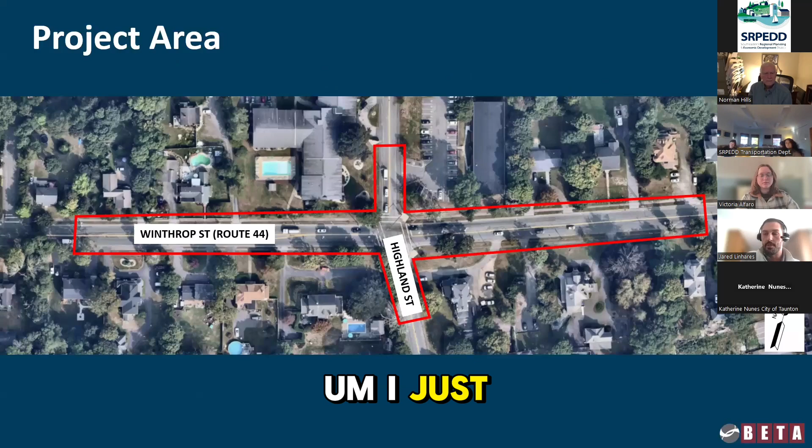My name is Jared Linhares. I'm the project manager from Beta Group, representing the city of Taunton as their design engineer for the project. I just want to start off with a brief project overview.

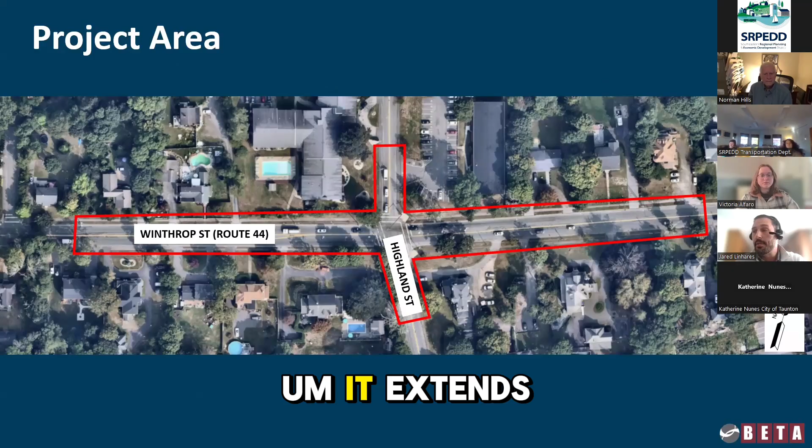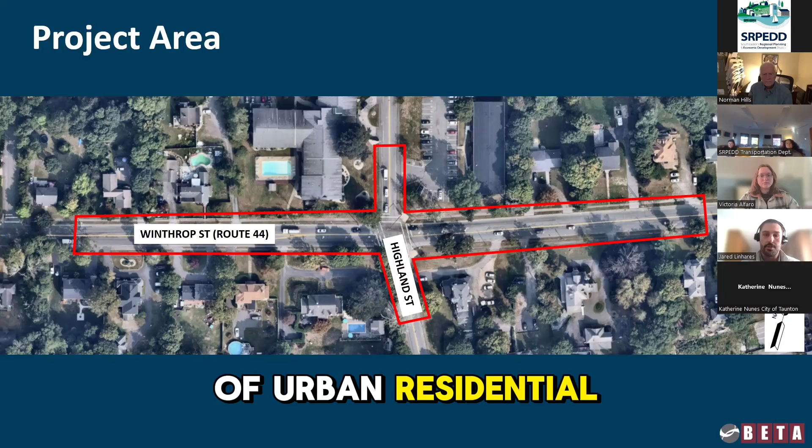The land use in the area is a mix of urban, residential, both single families, multifamilies, and apartment complexes. Highland Street runs in a north-south alignment, and both of these roadways are city jurisdiction.

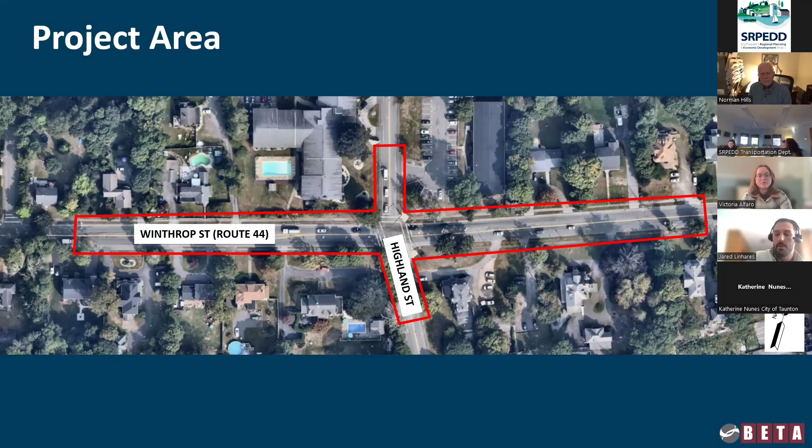The overall project limits on Winthrop Street are approximately 1,100 feet, and the overall project limits on Highland Street are approximately 320 feet.

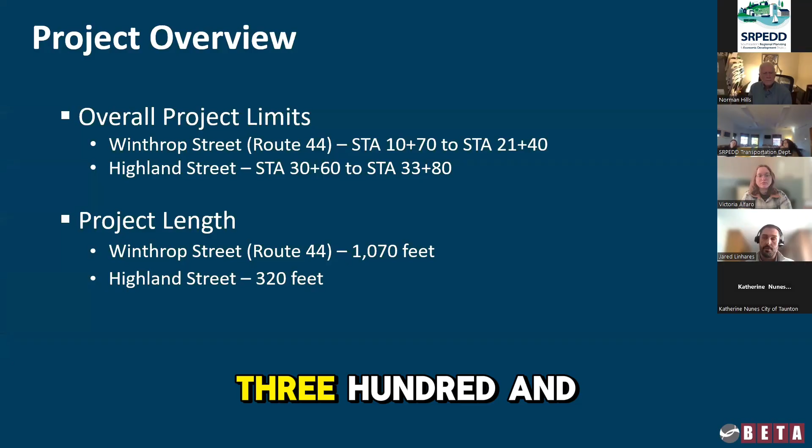This intersection was identified as an HSIP cluster for both the 2016 to 2018, as well as the 2017 to 2019 crash clusters. So as a result, we did a roadway safety audit in May of 2024, which was finalized in August of 2024. I just wanted to note that since then, this intersection is no longer noted as an HSIP cluster as part of MassDOT's latest years.

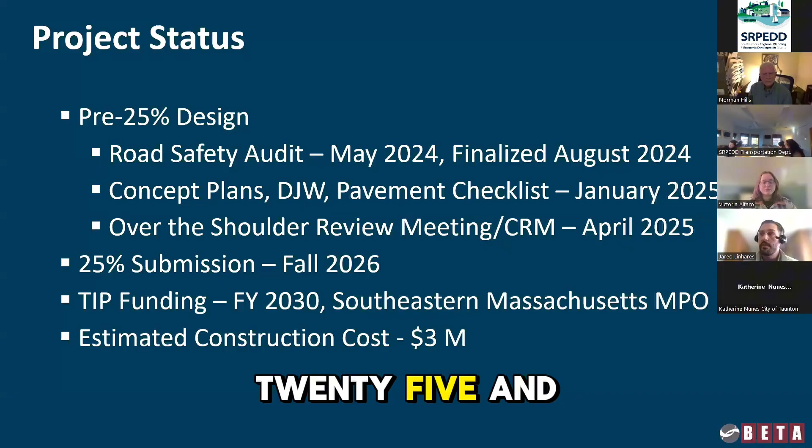The over-the-shoulder deliverables were submitted in January of 2025, and the over-the-shoulder comment resolution meeting was completed in April of 2025. The submission is expected in the fall of 2026 for the full 25% submission.

The TIP funding for this project is slated for fiscal year 2030, with an estimated construction cost of approximately $3 million.

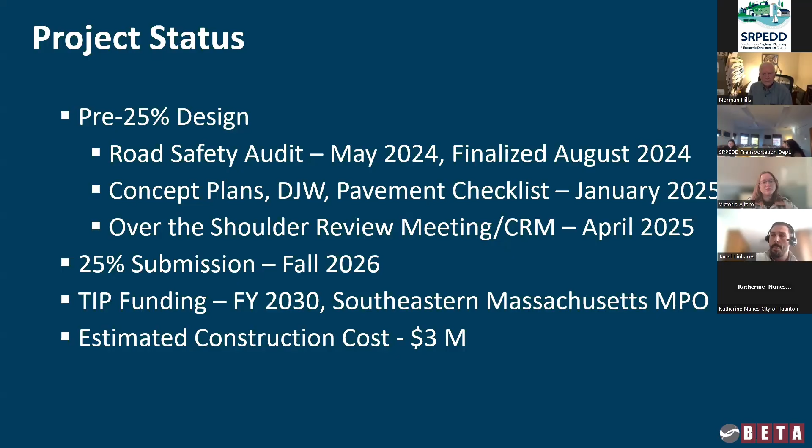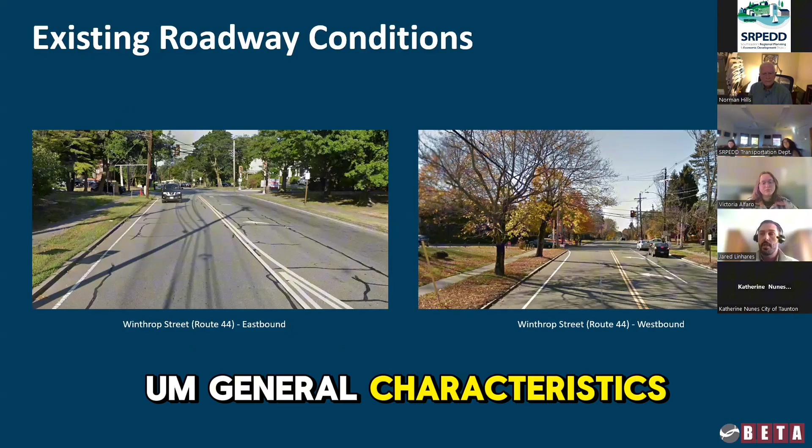Some of the existing roadway conditions - we'll start with Winthrop Street. We've got photos of both eastbound and westbound shown here. General characteristics: there's 11-foot travel lanes in each direction.

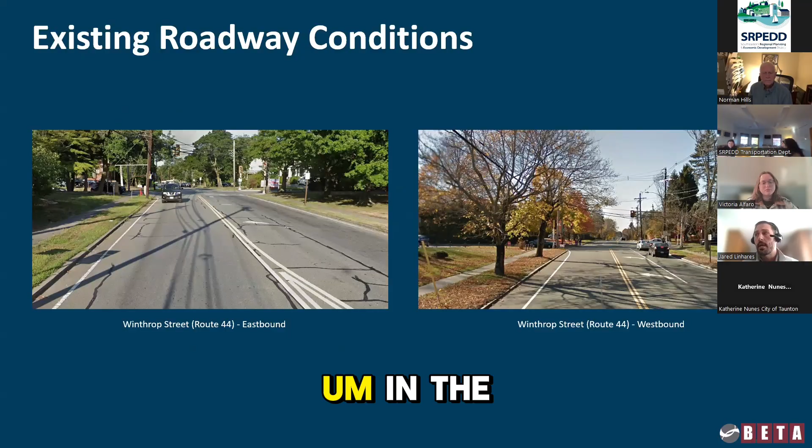As you approach the intersection, there is a dedicated left turn lane in both directions. In the eastbound direction, the length of the turn lane is approximately 180 feet currently, and the westbound is approximately 120 feet.

There's a double center yellow line with approximately 2-foot shoulders, and then there's bituminous sidewalk on both sides with a grass strip of varying width between 2 and 4 feet.

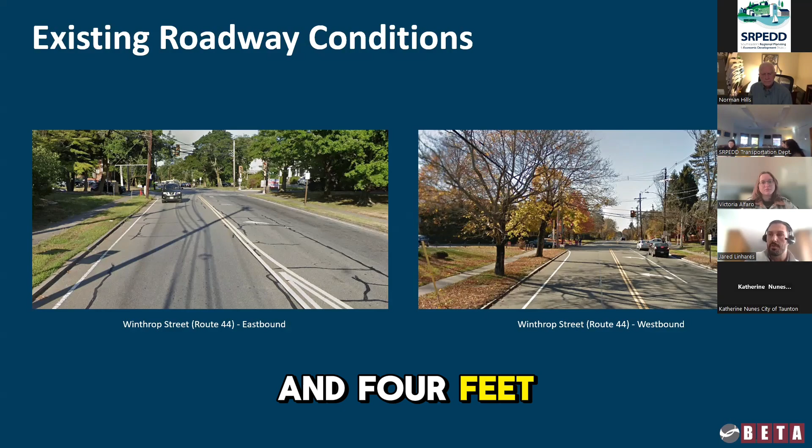On Highland Street, we have 13-foot travel lanes with no striped shoulders and a double yellow center line. There's also bituminous sidewalks on both sides of Highland Street.

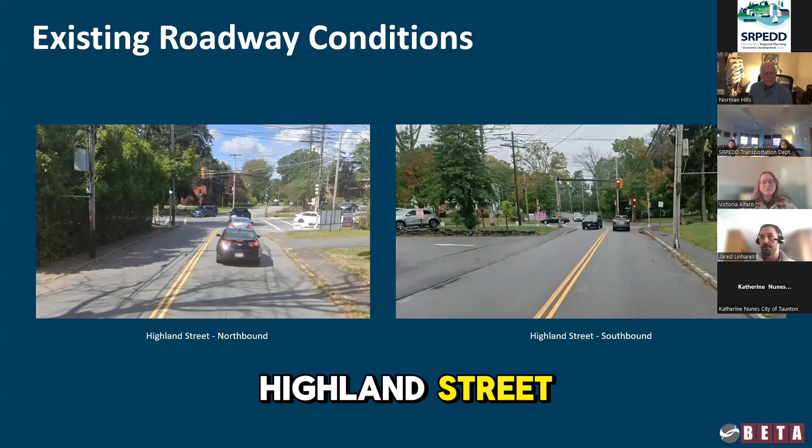The existing conditions at the intersection include a signal-controlled 4-legged intersection. There's currently 4 phases to the intersection.

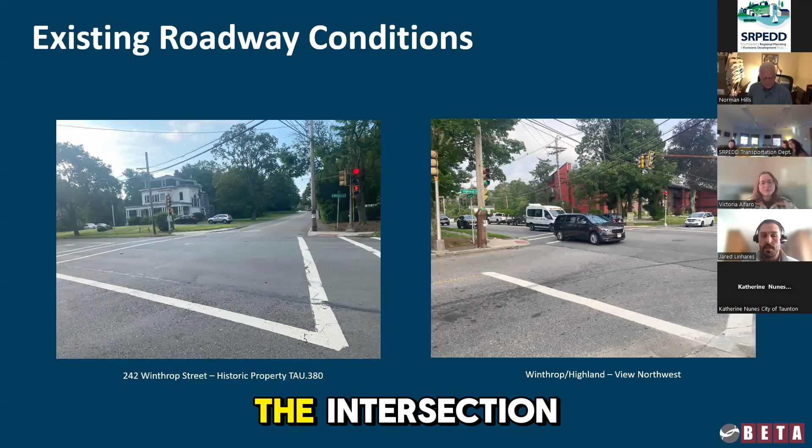There's a designated left turn lane on Winthrop. Then there's a designated pedestrian crossing. There's the designated through lane for both directions on Winthrop Street, and then there's a phase for Highland.

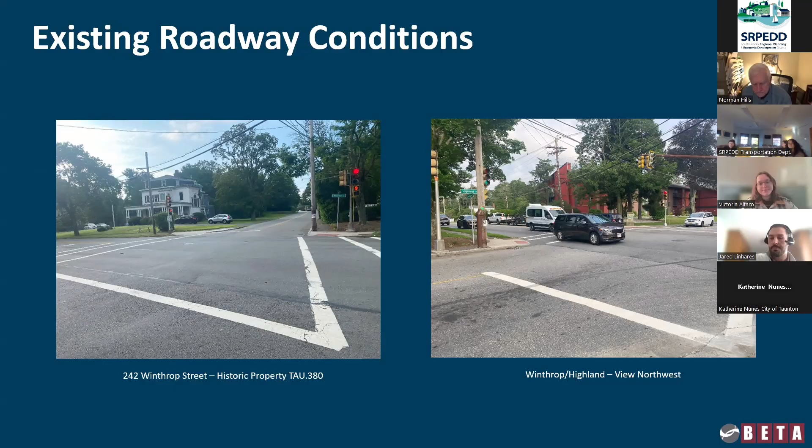There is a historic property located at the southeastern corner of the intersection, shown in the picture at the bottom left there. Historic building.

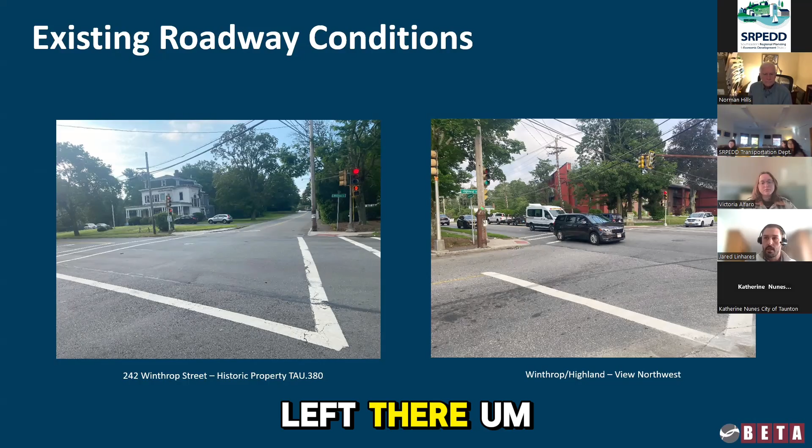As far as the project scope goes, we will be doing a new traffic signal at the intersection. As far as roadway rehabilitation goes, we anticipate mill and overlay with some full depth widening on Winthrop Street to accommodate the bicycle lanes.

So the proposed cross section on Winthrop Street will include a 5-foot bicycle lane on road with a 3-foot striped buffer, and then there'll be 6-foot sidewalks on both sides.

Highland Street will have no bike accommodations, but we will be providing sidewalk on both sides to match the existing. As I mentioned previously, there's the historic property at 242 Winthrop Street.

There's already existing impacts due to the sidewalk and some of the existing utilities on the corner there. So our goal is to minimize the impacts to what they are now, or at a minimum, we'll keep it to just the utility pole relocations that we anticipate.

As I noted before, we did the roadway safety audit in May of 2024. There were sort of 6 key measures that we'll look to mitigate as part of this design.

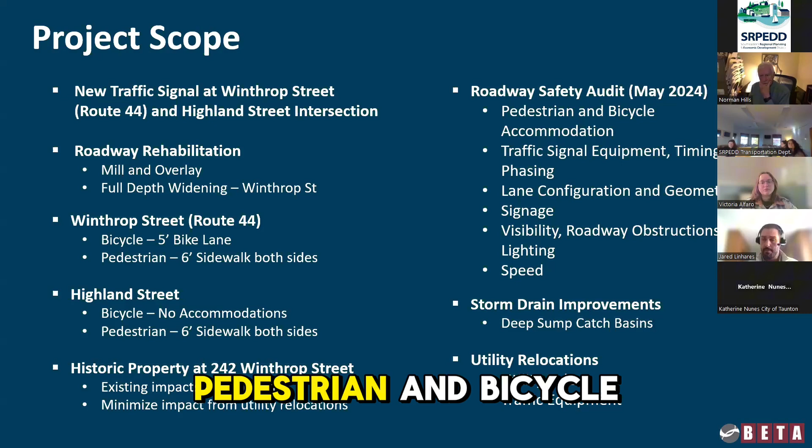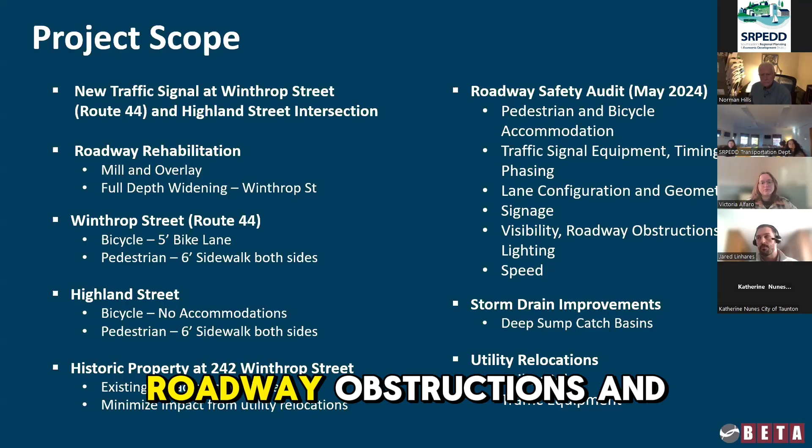Those include pedestrian and bicycle accommodations, the traffic signal phasing and timing, lane configuration and geometry, some of the signage, visibility, roadway obstructions and lighting were an issue, and then speed. So those are the 6 things identified that we will look to mitigate as part of this project.

As far as storm drain improvements, it'll mostly just be a retrofit of the existing system out there due to curb line changes. So we'll retrofit with deep sump catch basins.

And then utility relocations, we just anticipate due to the utility poles or some of the traffic signal equipment and the new curb lines.